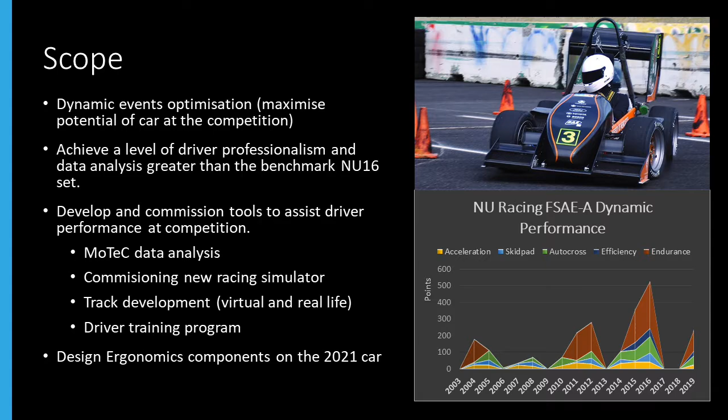My project involved developing and commissioning certain tools and programs to assist the driver. This included race data analysis using the team's Motec data logger, researching and commissioning new racing simulator software and hardware, track development both virtually in the simulator and also in real life at track days, and also designing several ergonomics components on the car. A large focus of 2021 was on the aspect of driver training.

The team has historically seen that the years we performed well at the competition were the years where we had the largest amount of driver time in the car. Often this has been an area that was neglected by the team, and it showed up at the competition. For example, in 2019 the team got disqualified from one of the events for going backwards around the course. This is a simple error which would not have been made if the drivers had the chance to practice beforehand.

In 2021, a three-stage program was created for driver training. Stage 1, driver recruitment and selection, would be from March to June. Stage 2, driver events assigned, would occur before August, and the important stage of driver training and development was set to be from August to December, in preparation for the competition in the second week of December.

Driver training would take on 4 different forms throughout the year. Unfortunately, while testing in the real car is clearly the most beneficial form of training, this is often not feasible on a regular basis. As such, other driver training methods would be used, such as driving virtually on the team's racing simulator or the full motion simulator at the team's new sponsor, Escape Zone. The team would also run go-kart sessions throughout the year, both from a driver training perspective, but also as a great team bonding opportunity. My background personally involves racing go-karts for the past 14 years, so this is something I was passionate about and considered to be a valuable driver training tool.

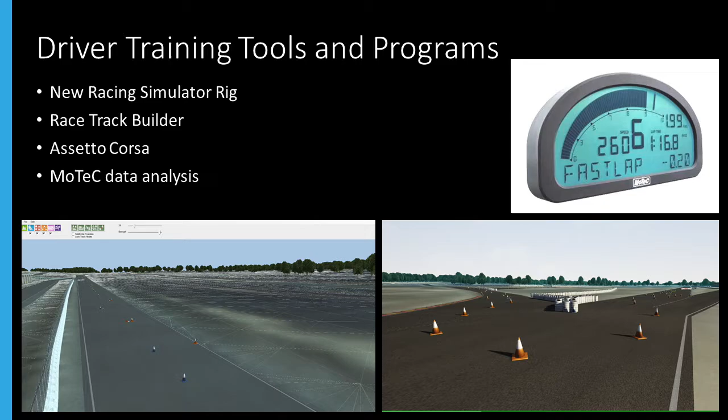A new racing simulator was introduced as part of my project in 2021.

The team's previous simulator was built in 2015 in the shell of a previous chassis. It was excellent in terms of realism, however it was also very heavy and large, which made it difficult to transport and store. The software and hardware used was also quite outdated and didn't provide much experience for driver training.

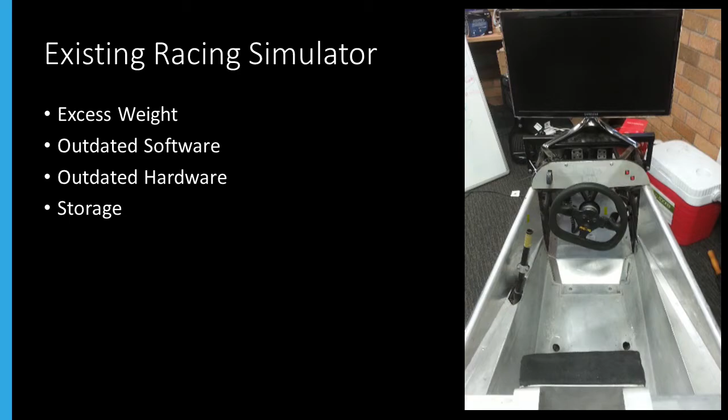The new simulator for 2021 would need to be durable, portable, lightweight, quick to set up and pack down, easy to store, and realistic.

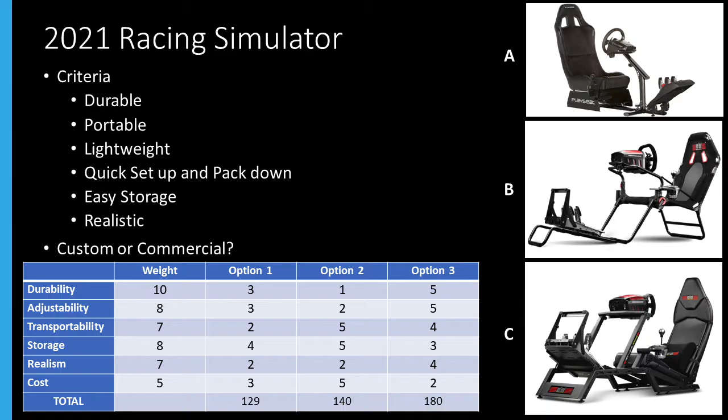This combination of criteria lent itself more to a commercially available rig rather than designing and manufacturing a custom solution. Several options were considered for the racing simulator, with the best three evaluated in a multi-criteria decision matrix, as seen here. From this, option 3 was considered to be the best and was purchased for the team.

The team also had the opportunity to do driver training with our new sponsor Escape Zone in 2021. This was a great opportunity to use a professional full motion simulator, which typically costs in excess of $50,000.

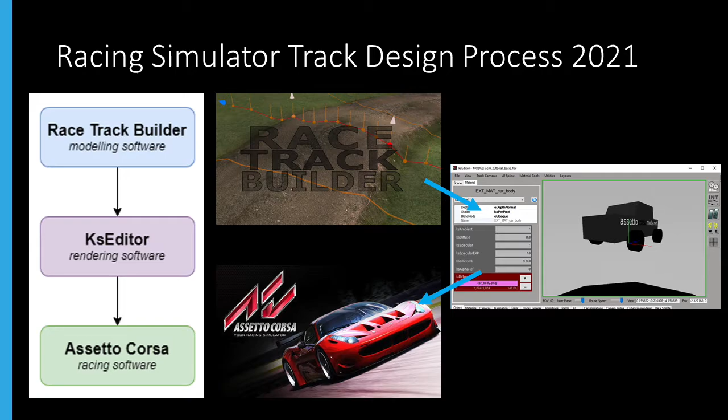It was important with the new simulator this year that software was introduced to allow the team to create its own custom tracks to test on. Racetrack Builder was chosen to create the tracks, which should then be driven in Assetto Corsa. KS Editor will be used as a conversion between the two.

Racetrack Builder was purchased to model detailed versions of the team's real-life test tracks. A total of 9 tracks were modelled throughout the year, including Winton Raceway, where the annual competition is held, Sydney Motorsport Park, and Coffs Harbour Kart Club.

For the first half of the year, the team utilised the University of Canterbury's car model for its driver training. This was due to the difficulty in creating a car model, and this was not a first priority for the team. Canterbury's model was found to be very close to what is expected of the team's 2021 vehicle.

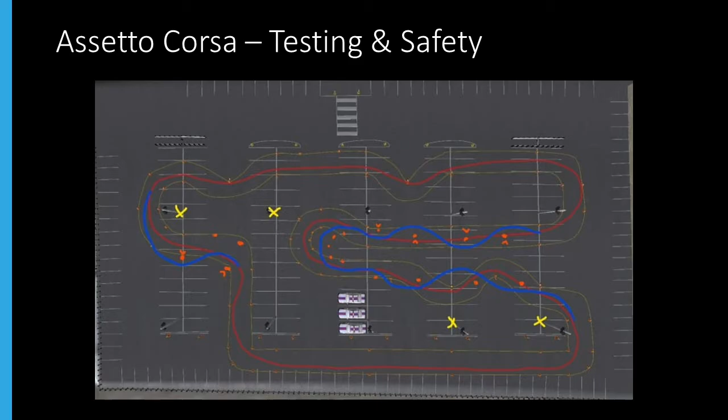Track layouts were able to be tested virtually before the team even tested in real life. This was part of the verification and validation approach of the team in 2021 and allowed for the safety and efficiency of the track to be tested virtually. This also allowed the team to compare the performance on the simulator with real life, which was very beneficial for driver training.

Also implemented in 2021 was a strong focus on race data analysis. The team has had a Motec ADL2 data logger for many years, however perhaps hasn't used it to its full potential. Historically, the team has struggled to use data analysis, and it has been very difficult to analyze as it had to be set up manually.

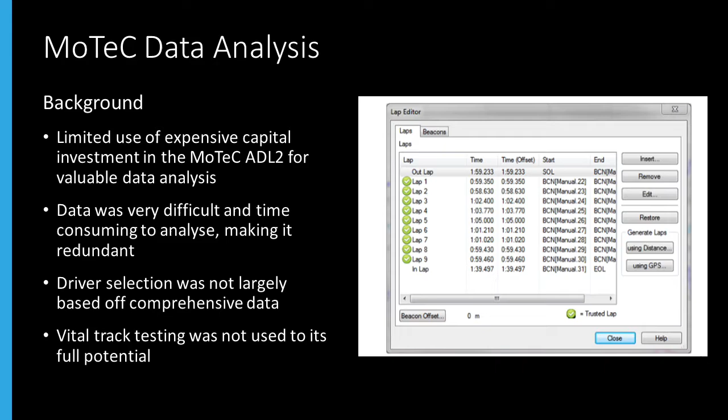A focus of my project this year was to implement a more data-driven approach to driver training, which involved extracting and analyzing this Motec data in a professional manner.

To assist in this in 2021, I had the opportunity to chat with several race and data engineers in professional motorsport teams such as Garry Rogers Motorsport. This showed that the tools that NU Racing has available are essentially the same as what is used on a national level. I also had the opportunity to study 2 online data analysis courses, which gave details on how to use many of the features of the Motec software to improve driver performance.

The data was used both for driver data analysis and also for car performance and health. In 2021, we were able to compare data from the real car with data collected in the simulator, which was a first for the team.

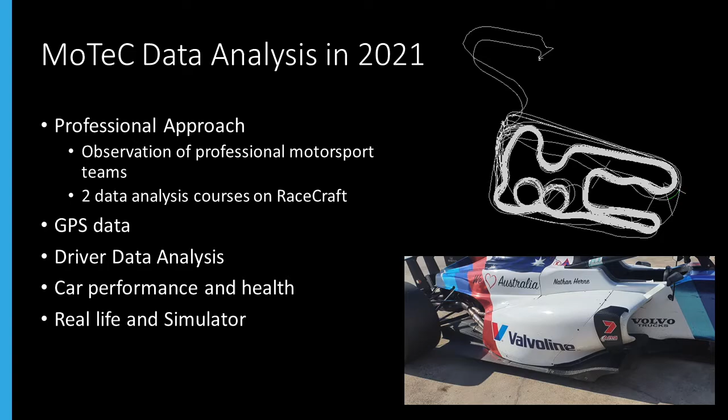Here's some examples of how data analysis was used throughout the year. This example shows 2 data traces comparing the best laps of 2 drivers. Often when analysing this data, you would look for the biggest jumps in the variance channel, which is the top channel in this image.

What you can see is that right near the end of the lap, the reference lap shown in the coloured line has a large drop in speed and loses time. This correlates with when the trail brake switch is triggered, which effectively cuts the engine for a small amount of time. This information can be relayed to the driver, so they can adjust their driving to stop this from happening in the future.

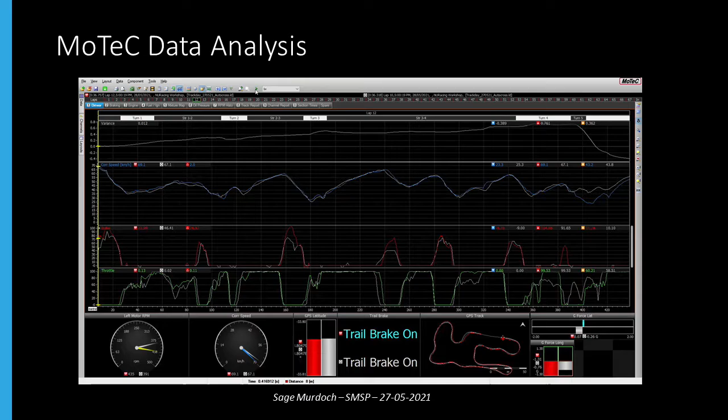Here's another example of a lap overlay comparing two drivers around a hairpin corner. You can see that the reference lap driver is braking 3 to 4 meters later into the corner, so it's gaining speed into the corner, however is losing speed out of the corner.

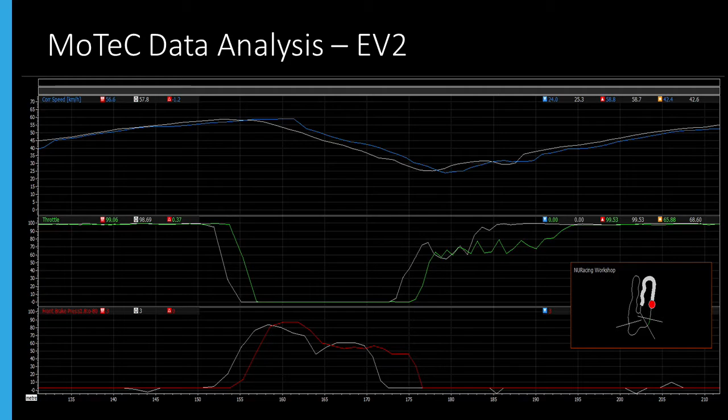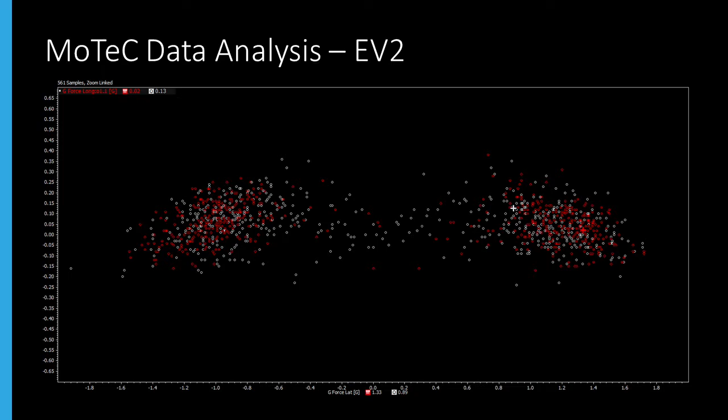This graph shows a scatter plot of the lateral and longitudinal g-forces in the car. This can be used for driver training or car performance when new components such as the aero kit are added.

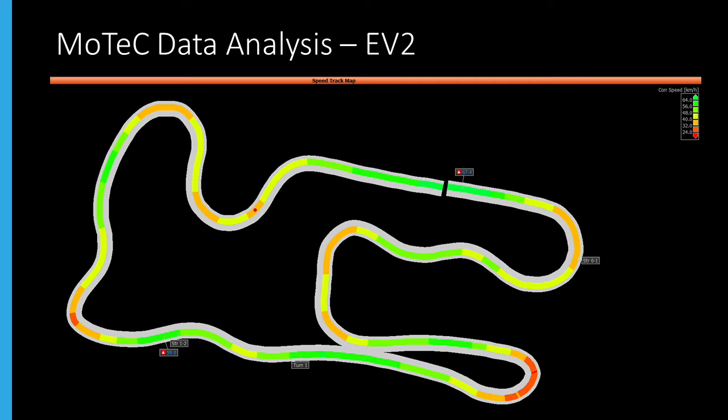Another tool we can use in the MoTeC data analysis software is track mapping. What we can do here is effectively map any log channel around a lap. For example, here you can see the speed mapped, where you have the green in the fast sections and the red in the slow corners.

Mostly in 2021, data analysis is used for driver training. However, it can also be used for monitoring car health and performance. For example, here you can see the motor RPM and temperature data overlaid between two laps on the same day. What we can observe here is a difference of 30 degrees in the motor temperature between the two laps. This caused a loss of power out of the slow speed corners due to the motor overheating, which was observed by our drivers and also verified on the data.

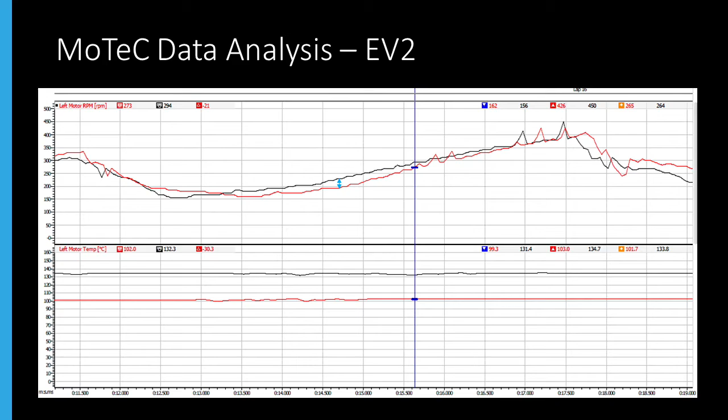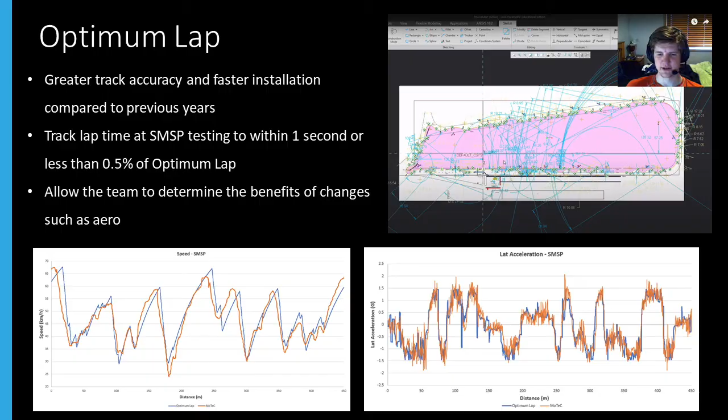Optimum Lap, another program the team has used previously, works out the theoretical best performance of the car around a given track. Part of my project was to improve the Optimum Lap usability given the GPS data, allowing us to input the track data much more efficiently. Last year's approach involved creating a crazy looking sketch in Creo. From this Optimum Lap output, we were able to see that our drivers were extracting close to the maximum performance of the car.

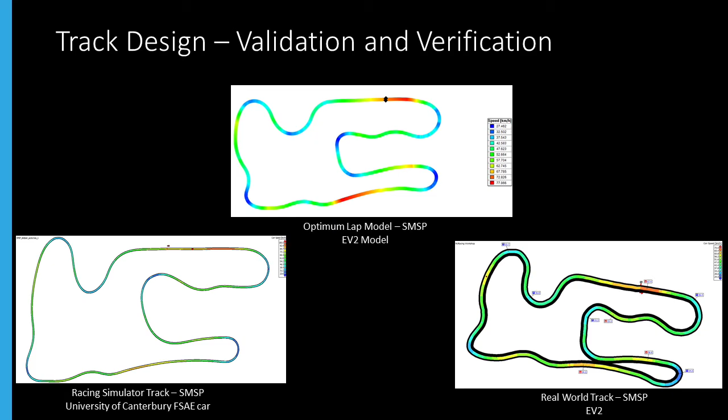It was also important to validate the data against each other. These images are a comparison on one of our test tracks, in Optimum Lap, real life, and our virtual simulator. The speed mapping between all three is incredibly similar, showing that each tool could be used independently and reliably. My scope also included designing several ergonomics components on EV3.

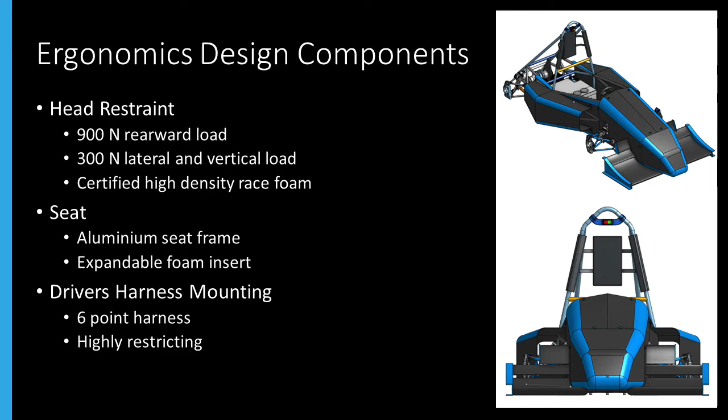These included the headrest, seat, and driver's harness mounting system. Some of the regulations around these safety systems were understandably very strict, which made designing these components a challenge. Here you can see the head restraint system I designed, improving upon EV2's design. This was analysed using a finite element analysis approach to ensure it could support the required loads. A jig was designed and 3D printed to ensure it could be accurately welded to the chassis.

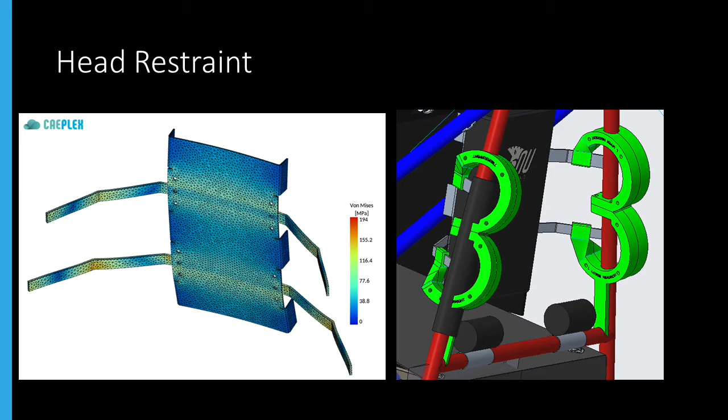The seat was determined to be an expandable foam seat insert, based upon our largest driver. The expandable foam needed to have some nice support to sit against, so an aluminium seat bucket was designed, which can be seen in these images. This would be laser cut and bent.

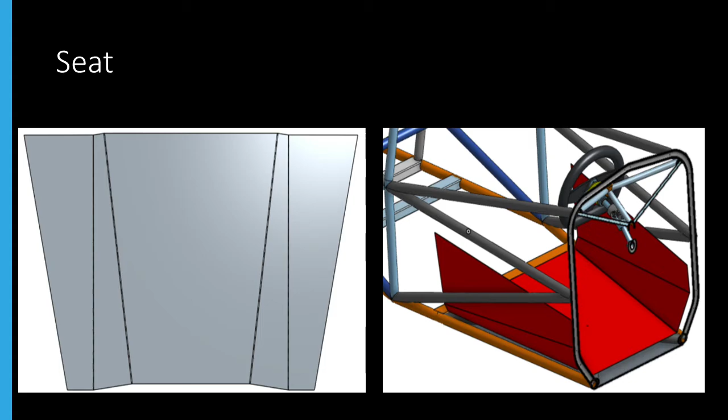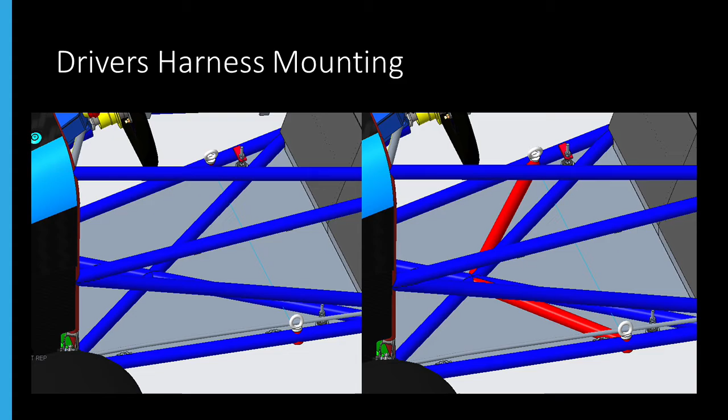The harness mounting system was comprised primarily of these two eye bolts you can see, mounted directly to the chassis. Many different mounting methods were considered, however this was determined to be the most ideal. The red supporting tubes you can see were considered, however were not required by the rules.

The second half of my project was significantly impacted by the COVID restrictions, unfortunately. This year's car could not be completed, and therefore no track data could be collected, which is effectively the largest area of my project. However, a strong base is set up for next year's team to perform well at the 2022 competition.

It was important that the knowledge I had learnt throughout the year was transferred onto next year's team. To do this, I will be creating a YouTube tutorial series which effectively gets new team members up to speed on everything driver training related.

2021, from my perspective, was about building a benchmark for next year's team, and I believe that this was able to be achieved. Well, that's all I can fit in a short video about my final year project.